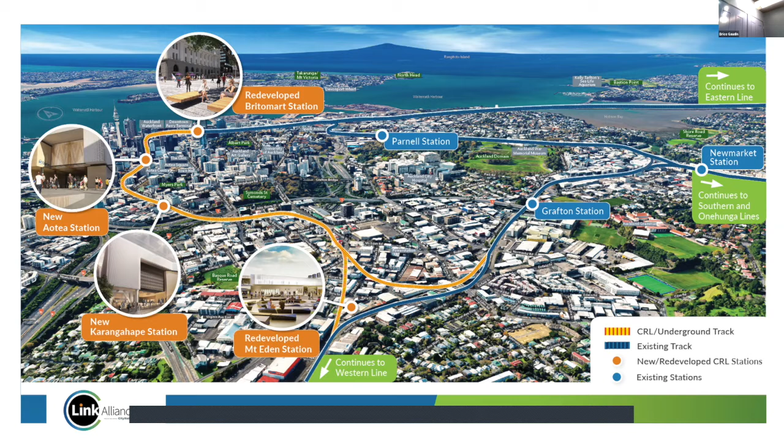The fact that this link will be operating will double the capacity of the Auckland network in terms of mass transport, with up to 54,000 passengers per hour. So it's double the capacity. It will also double the number of Aucklanders being able to reach the CBD in less than 30 minutes. So this project is really transformational. It will really transform the city.

So when you build a link like that, of course, you take the opportunity to create new stations. And we are also constructing 3 new stations. The first one is Aotea, just next to Aotea Square. One is Karangahape, and the last one is Mt Eden Station. In fact, there is already a station there, a very simple platform, but I will show you a picture. We are redeveloping completely this station.

The fact to create new stations in the CBD will also transform the city. And you will see an impression of what the development around Mt Eden can be, but it will be massive.

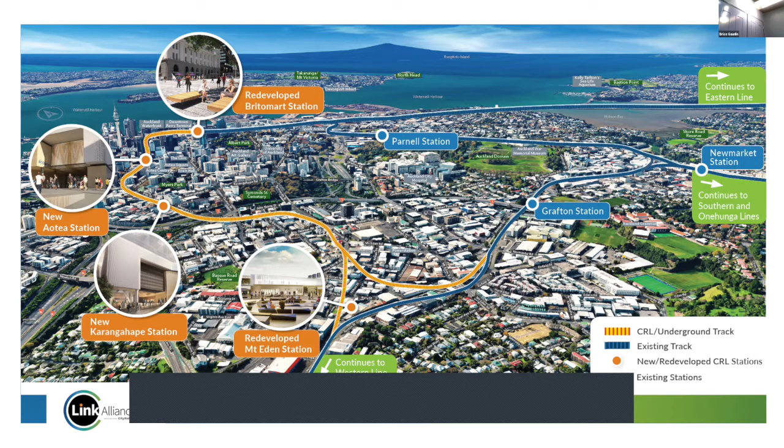So this is the cross-section of the project, 3.6 kilometers long, from Britomart to Mt Eden. Britomart, the existing station, is under sea level. And Mt Eden, you see, is 70 meters above sea level. You see the slope here - we are at the limit of what a train can climb. This is a challenge today for our engineers, because the platform has to be horizontal, and what is left to climb 70 meters is just enough, 3.8%, which is the maximum possible for a train. After that you have a problem between the wheel and the tracks.

Aotea station, in fact, is built underneath Albert Street. I will show you a picture. It's a station which is not very big, 18 meters deep, just underneath the street. Karangahape is a very big station, 42 meters deep, so it has to be built like a tunnel on a shaft. I will show you a picture. We have already excavated the shaft and we are now tunneling to create the underground platform.

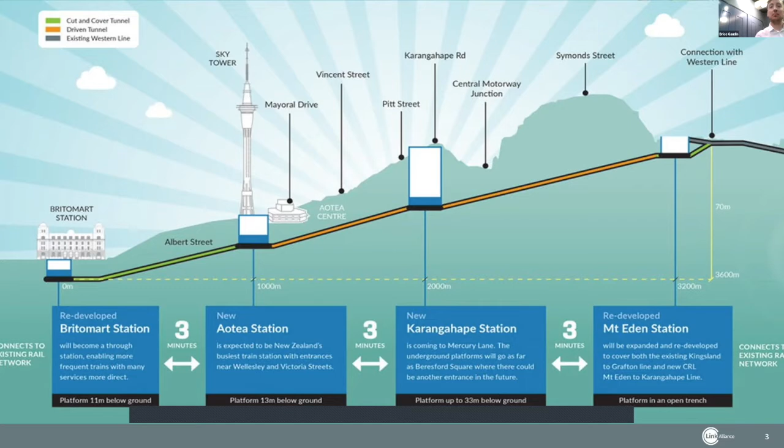So let's make the journey to our City Rail Link. We start at Britomart, so you recognize here Britomart. So the train today stops at Britomart and has to reverse back to Parnell and Newmarket, but in the future they will be able to continue in the other direction. So there is a necessity to build a tunnel underneath the central post office, and this project is almost complete now.

It has been realized by Soletanche Bachy, a subsidiary of VINCI, and Downer. Very challenging building - I could speak a lot about that, because you can imagine making a tunnel underneath a heritage building, it's quite complicated. So it's a piece of engineering, only this project. You don't realize it when you pass nearby, but it's a very interesting project. Then the tunnel goes underneath the Commercial Bay, and having a very sharp curve, goes underneath Albert Street.

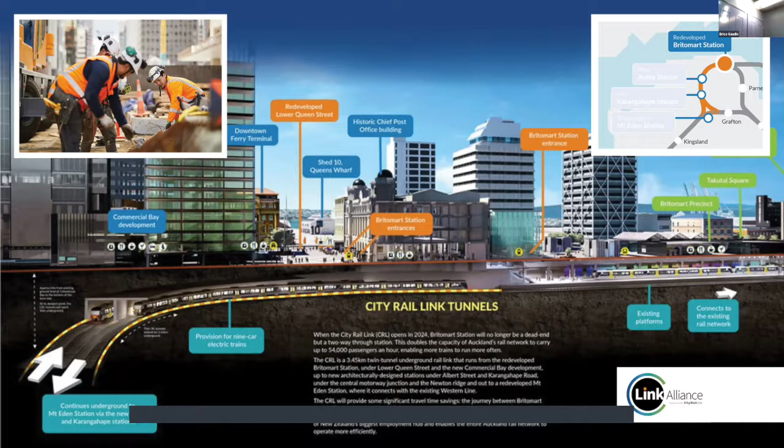Then we arrive at Aotea station. So here you have Victoria Street, crossing between Victoria Street and Albert Street. You see the station we are building, 18 meters deep, 15 meters wide. You will have the train going at that level, and here you have the concourse. We are building here - this is the entrance to the station. On Victoria Street, here is the Auckland Council offices.

This is a picture of what's happening now. To build this station underneath Albert Street, we have to construct what we call diaphragm walls, which are concrete walls on both sides of the street to be able to excavate the station.

This is a high bird's eye view, I think it's taken from the top office. This is taken from, I think, the higher level of the City Council office. You see the structure entrance here - this is this building. So this is the equipment to construct the diaphragm wall.

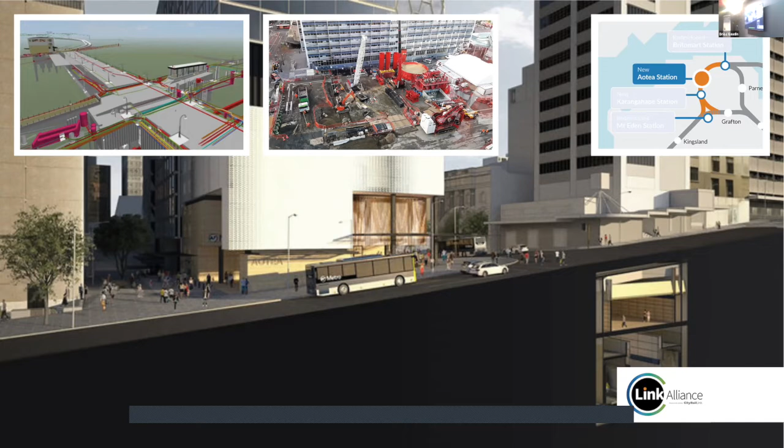Here you can see an illustration of what we can do with BIM to locate - here I think it's all the utilities on the street. And you can imagine when you construct a station like that under Albert Street, you have a lot of utilities, from water, wastewater, power, communication, whatever, to divert before we can do the job.

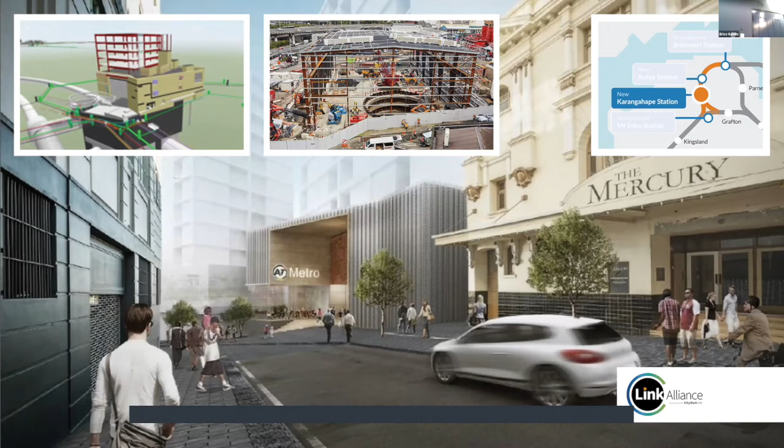Let's go to the next station. So here we are at Karangahape. This is Mercury Lane, and you know the Mercury Theatre - this is also a heritage building. And next to the Mercury, we are building the entrance to this Karangahape station.

So this is the entrance. I told you that the station was very deep, 40 meters. We have already excavated a shaft down to the 40 meters, and from the shaft we will excavate what you see here, the two platforms. On top of the shaft we have erected a noise enclosure, so we will be able to work 24 hours a day, eventually 7 days per week.

Last station is the Mt Eden station. So you can see here somewhere Britomart. The tunnel will come in and will connect to the Western Line here. This is a new redeveloped Mt Eden station connecting to the existing platform which is there. And this image shows you what could be the redevelopment at Mt Eden.

Today, this looks something like that. So we have excavated here what we call the portal. It is already 25 meters high, and from the bottom of the portal we will have the TBM, which will be launched eventually next year in April.

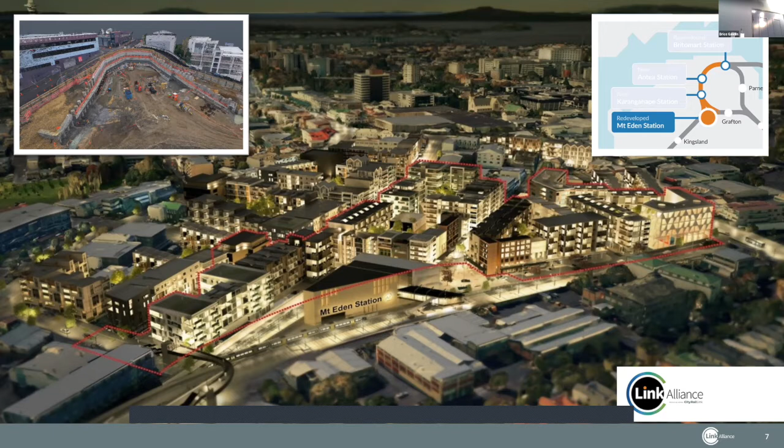So the way to deliver this project is through what we call an alliance. An alliance is a type of contract where you find 7 entities: 3 contractors, VINCI Construction Grands Projets, Soletanche Bachy, with both VINCI Construction Grands Projets and Soletanche Bachy being subsidiaries of the VINCI Group, and Downer, which is a very well-known New Zealand company. 3 designers, probably you know the names, AECOM, WSP, and Tonkin and Taylor. And our client, City Rail Link Ltd.

We see the City Rail Link Ltd, and we are all working together. So for those who are in construction, you know that we are used to working in joint venture. Here we can say that we are in joint venture with our client and our designer. So we take all decisions together for the best of the project, and we share everything together. We share the money together, we share the pain, we share the gain. So the principle of the alliance is everybody wins or everybody loses. This is a very interesting way to deliver very big and complex projects and drive a very interesting dynamic into the project. It's quite successful.

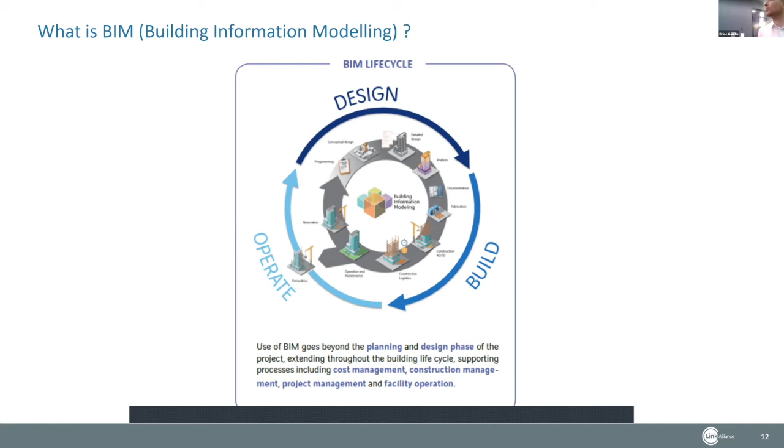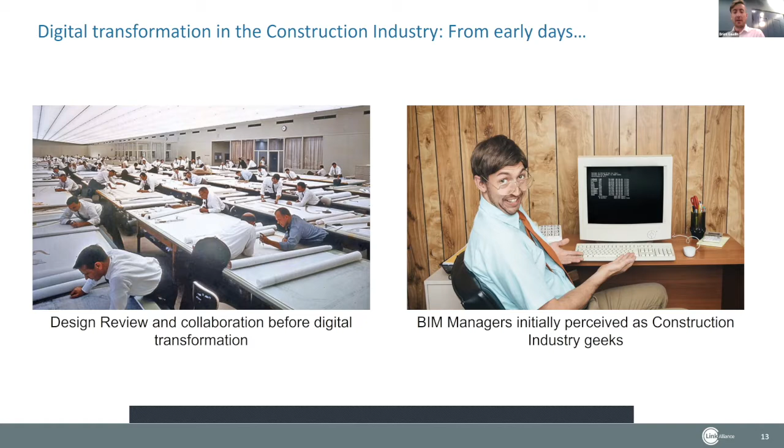Like robotics, 3D printing, cybersecurity, simulations - all these trends are shaping the way we work and the way we will work in the near future. One key point of this is not to be mistaken by the digital transformation and the technologies associated to it. That's probably the key point of driving this and driving the journey of moving to digital delivery.

So the first use case for that is probably training people to use this new way of working technology, and then coordinate all the BIM models, BIM designs, perform some design visualizations, help the pre-construction, help the construction methods, help the people on site, bring this technology to site - BIM to site, digital tools to site - so people can use it in their daily lives, daily job, and in the end, give this whole set of information to our final clients or final users as handover information.

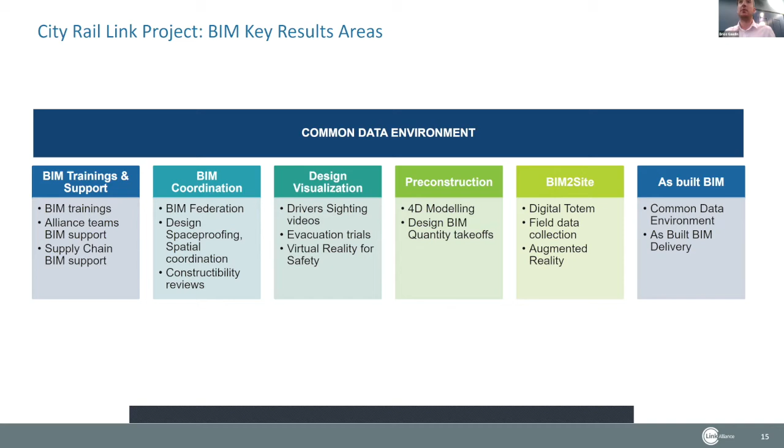So the intent of today is just to go through these different items to show you how we're effectively implementing them on projects and how it helps us deliver the City Rail Link.

All right, the first item will be the common data environment. The purpose of BIM is to break the silos and enable people to work together in a common database or common source of truth. That's what we usually refer to as the common data environment.

More than that, it's also enabling people to do the data harvesting themselves, not only having a BIM guy on the side doing all the digital tools, but having people involved in using the data that they are producing - quality assurance data, cost data, project management data, many things we can go through in this presentation.

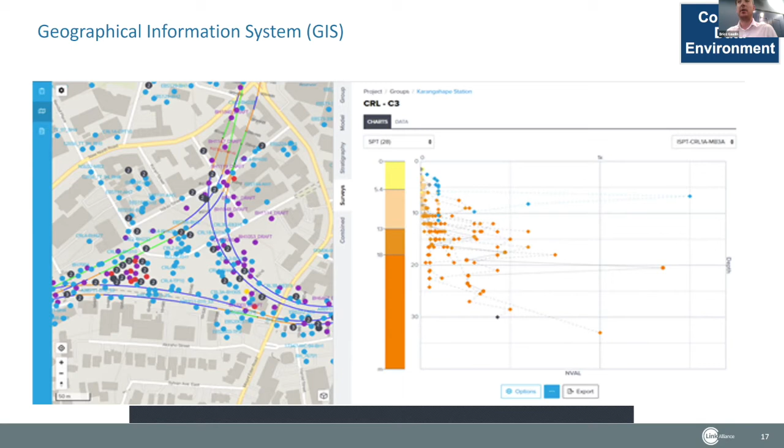All right, next topic is how do we train people to be able to use these new emerging trends and technologies.

We have put together a set of trainings and support to enable the different teams of the project to use it. In this project, we have design, engineering, construction, project controls, environment, sustainability, communications, and our team is central to support all these different entities.

We developed custom trainings and provided support to those different teams for BIM software mainly.

What you see here, we have almost 350 people trained to date, but it's going to grow up, especially when the supply chain is fully on board. At the moment, we are getting the supply chain on board, like subcontractors and suppliers, and it's going to be growing in the next couple of years.

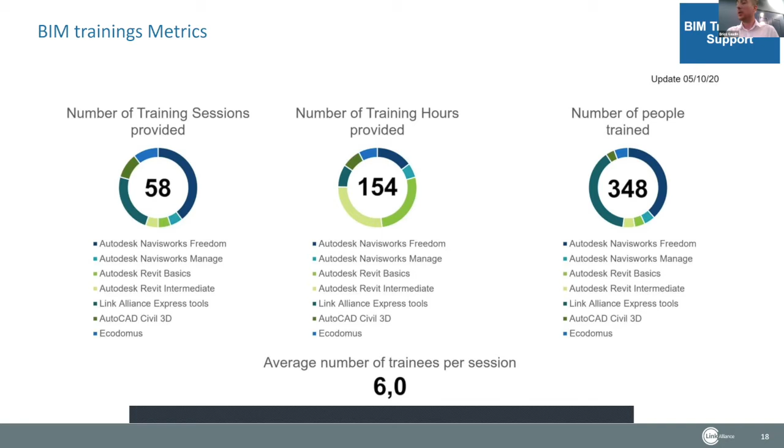We have a dedicated training room, a computer-based training room, where we provide those trainings. We have 6 seats, and every week we have people coming there - subcontractors, suppliers come to get those trainings.

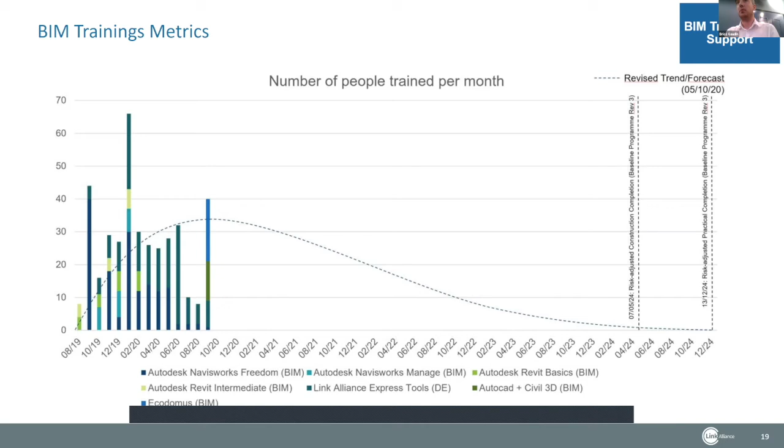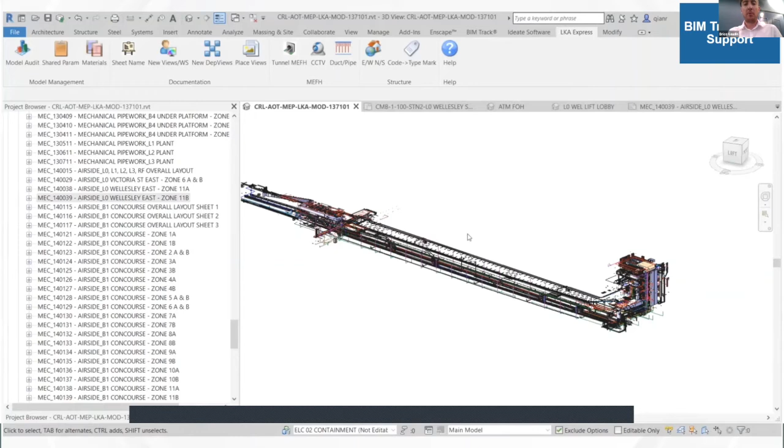The next step is to be able to deliver, first of all, the design model. What we have in our team is a team of software developers that developed plugins in the software we use, the BIM modeling software. In this case, you see Revit, the main design authoring tool in our project. We have a team of developers that develop plugins in this software to cover for some shortcomings, because Revit is mainly a building tool, but when it comes to tunneling, it's very difficult to model in Revit.

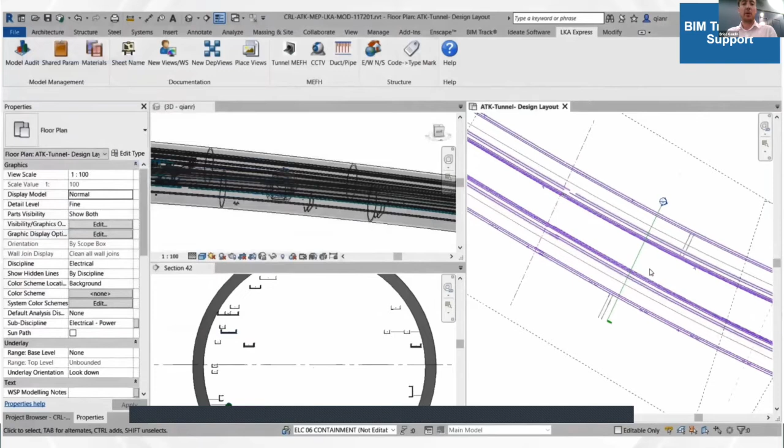So we developed this plugin. What you see here is the placement of cable trays in the tunnels, which is not easy with the regular tools of the software. We had to develop this, and it's quite good actually, because usually when we develop plugins, we outsource - we ask a specific developer outside of the team to develop for us. But here in this project, we have people with this capability, which is great to have in-house.

The next approach is probably a bit more common. What you see here on the left side is our coordination meetings. What we want to see here is that our model is the central truth.

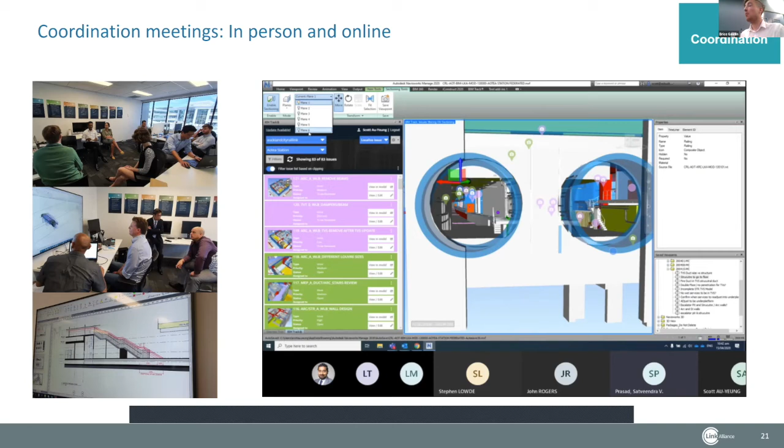Having this during the COVID pandemic era was really crucial, because since everything moved online, we were able to pursue the design, not the construction activities during level 4, but at least the design and engineering was still happening during COVID. I'll move a bit faster.

The idea here is the data harvesting for BIM issues. What you see here is the issues per area. We are able to manage the coordination issues that we see in our model, and having this in a data-oriented approach rather than spreadsheets is really great.

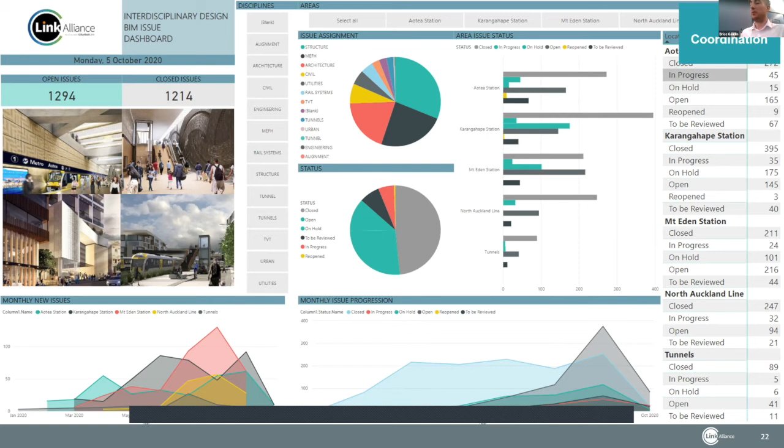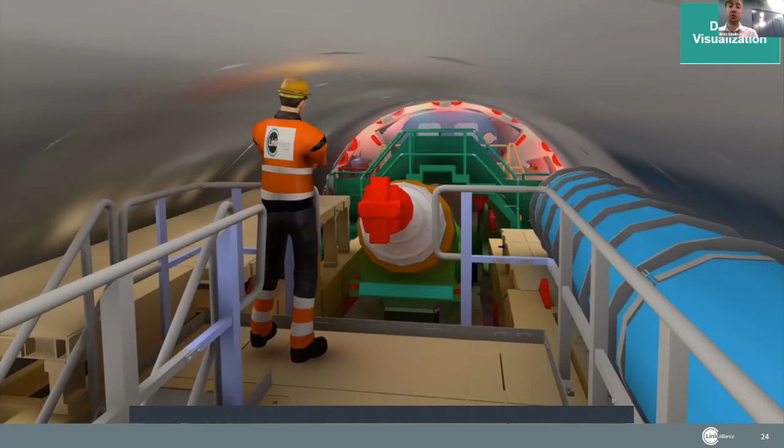Very crucial for us to merge physical assets and digital assets. An example: diving into the TBM, tunnel boring machine, we developed a health and safety virtual reality environment for our people on site, for them to understand what a TBM is and what the hazards are. This is very important because these works are not usual in New Zealand, or even everywhere in the world. Having this virtual environment helps people understand how construction will happen, and it's also much cheaper for training than doing it in a facility.

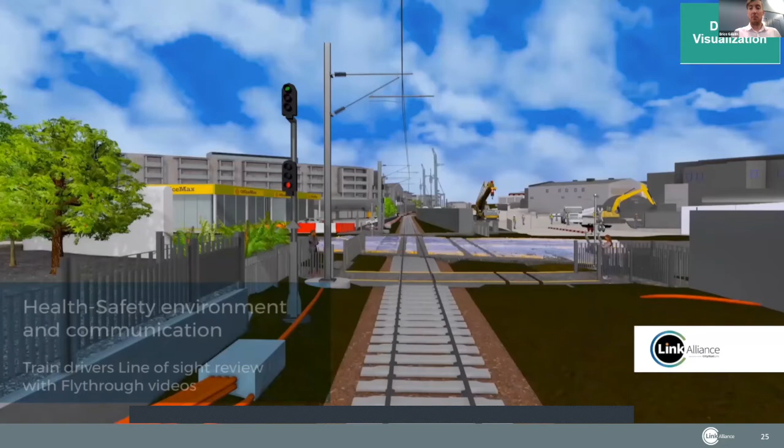So we work closely with the H&S teams. This is another example. That's my time now, so let's give you an example.

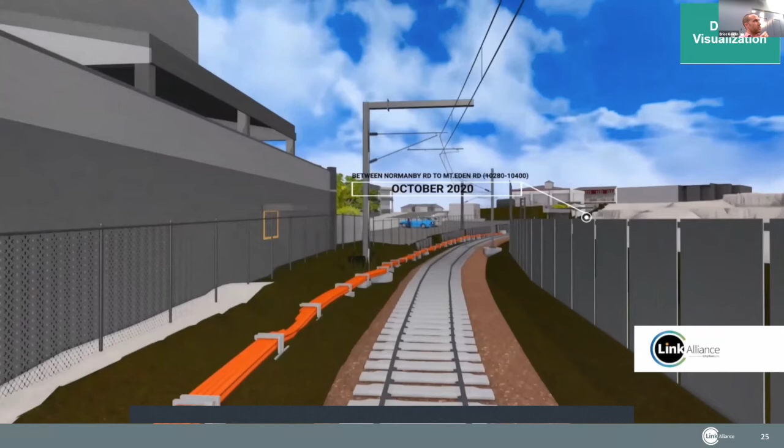Let's give an example of the way we use the BIM model and the information we've got, to provide information regarding the staging of the work. You've got the drawings done for the project, but you can see that sometimes the staging of the work is better shown another way.

For instance, for that project, we decided to produce a drawing showing what the state of the single line running in Mt Eden on the North Auckland Line would be, so that both the stakeholders, the neighbors, and the train driver can see what they're going to face during construction.

You can see we've installed that hoarding. That hoarding is on now, installed in the last couple of months since the single line running has been operating.

Basically, the information shown is a mix of the current design of that stage, along with the point cloud information slightly enhanced by the team. That gives the drivers almost like a training, to make sure they know exactly what it will look like for the next 15 months of their job. That's one of the ways we work on those things.

On a practical level, all the data collected by the BIM team and digital engineering includes the design quantity takeoff. Brice insists that all the drawings are updated and federated, and then everything is collated, so we can see the evolution.

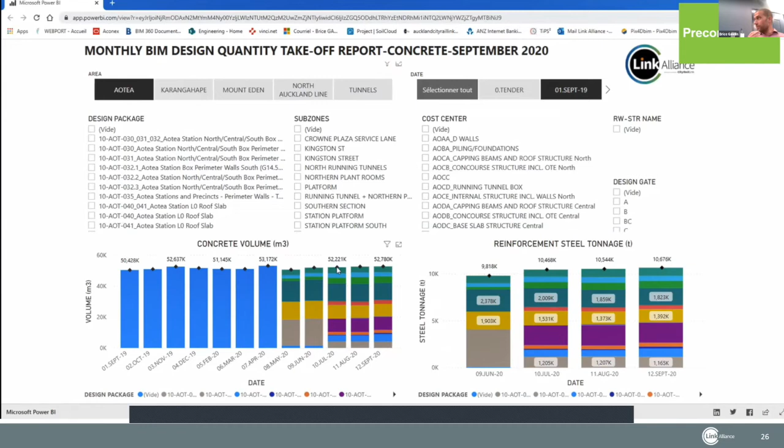That's something we've used in our reforecast. We can monitor the progress of the design and potentially value engineer if needed. That's a very valuable tool, which is why it's important that all the information gets collated properly in the model, so we can rely on it.

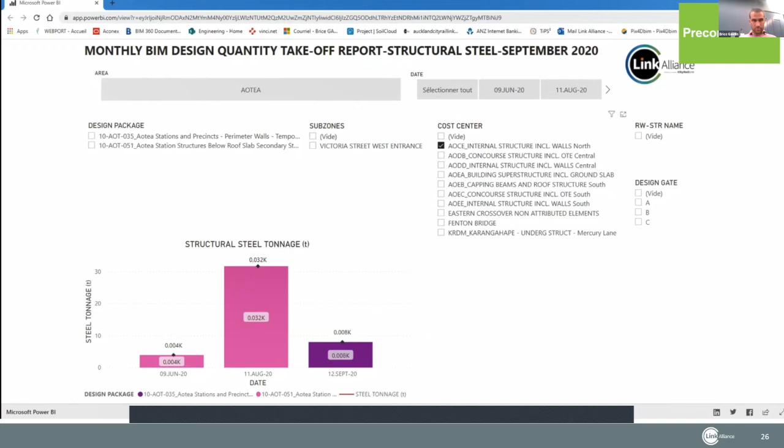That's basically the tie-in between the North Auckland Line and the station. Let me go close to the screen and try with the microphone.

It's something that is very hard to visualize on drawings. On 2D, you see a spaghetti of tracks, and in cross section it's very hard to comprehend. When you put something like this together, to me, it makes a lot more sense.

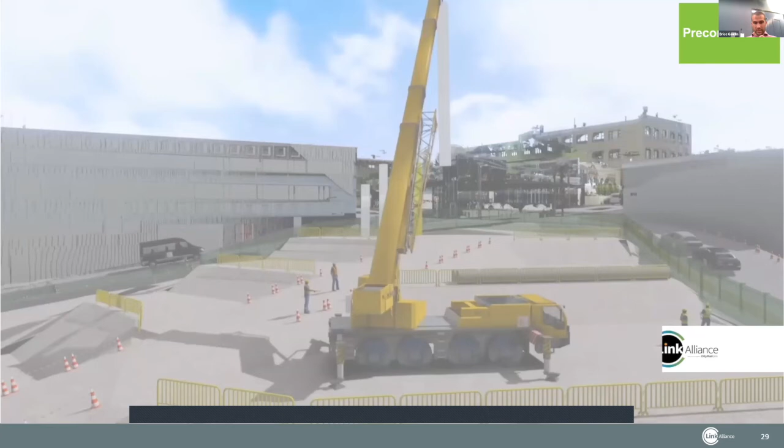So that's also one of the videos that we produced both for the stakeholders, but to be honest, it was quite useful for some people from my team that were new to the project, so they could understand how we build the portal.

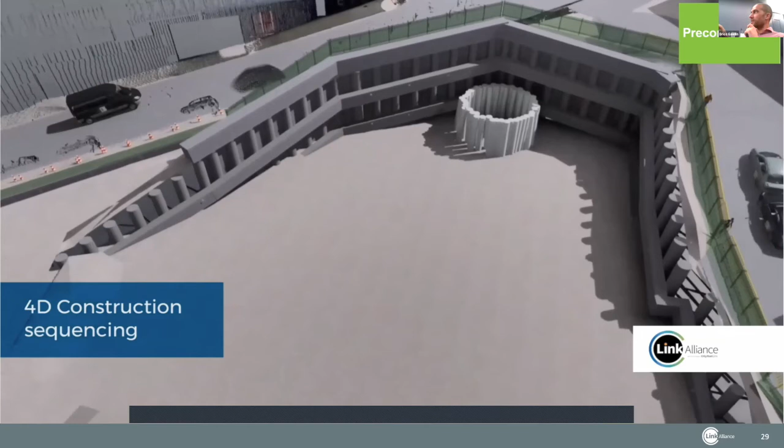So the idea is to integrate the methodology into a 4D principle to show the evolution of the work over time. What we see here is the fact that because of the gradient of the road, we have to install a platform and then start the piling from the top and go down to the next platform, etc.

So that's the type of information that doesn't communicate very well on 2D. And even for people like media, such as TV3, which are literally just next door—that's the building you can see on the top left—explaining this to them, since they could see it from their window, made a lot of sense.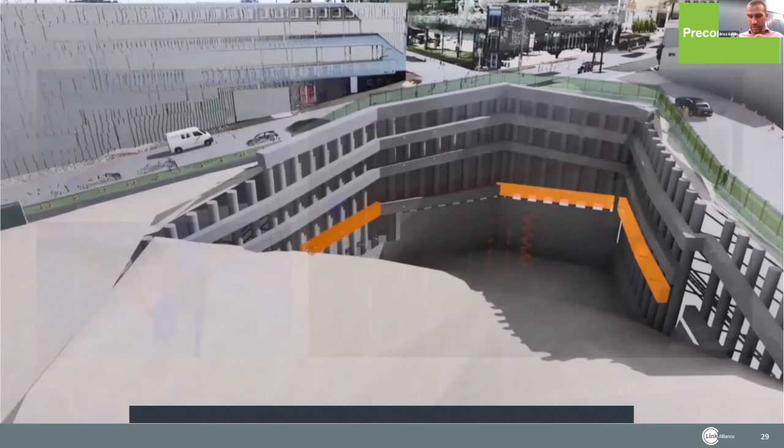It helped them see what was coming and was very useful. So that's the type of use that we've got on the project.

So that one is really to show, and as Brice was saying, it's a complete mix of existing survey. What you can see on the outside here, which is very much in color, is the point cloud survey that we do.

We do a drone flight every month at least. We use it to measure the quantity and the progress as a record.

It's basically a mix of the design of the ground retention to build the tunnel, but also the site installation for the tunnel. So what you can see here is our offices, the car park.

What will be the technical area to support the tunnel boring machine, the spoil shed, which is at the bottom here—a building which has not started yet—and then the segment storage. If you went on site now, you could see all those retaining walls of the portal and of the segment storage, but a lot of groundwork for utilities.

So that's a very good depiction of what the site will look like in April for that picture.

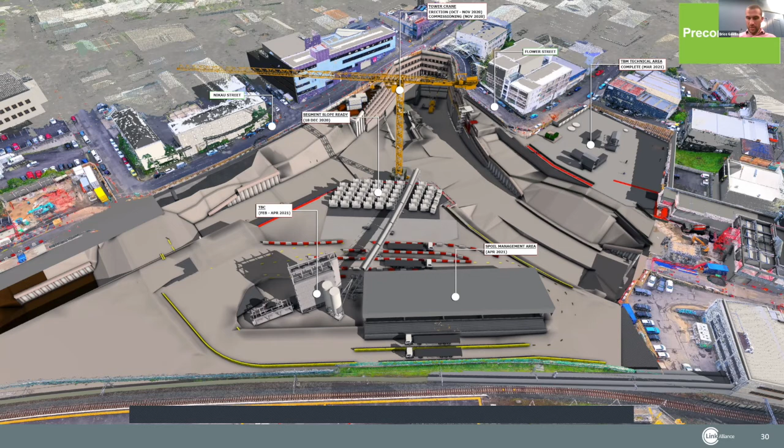And then you've got another view to give you a bit of perspective. That's a view taken from up high, as if you're standing on top of the platform looking at the portal this way.

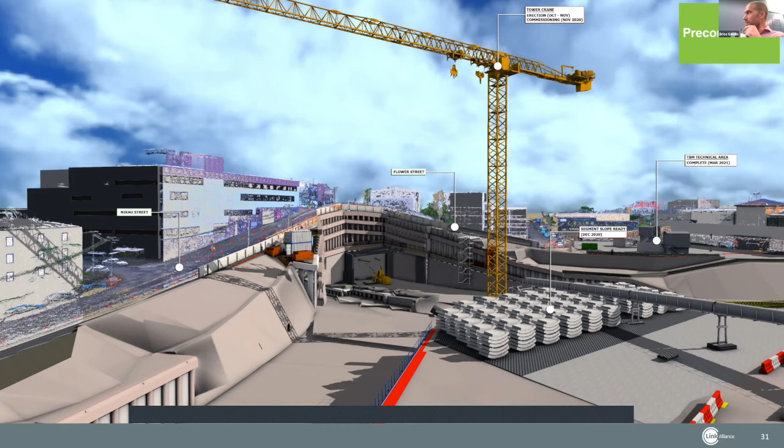At the moment it's looking pretty much like this, except you don't have the segments stored in that location yet. You can see the conveyor running from the right, which will remove the spoil from the tunnel boring machine. It runs all inside the tunnel, operating 24/7, and dumps it in the spoil shed. It's a very good way of explaining to neighbors, visitors, and other interested people how the tunnel operates.

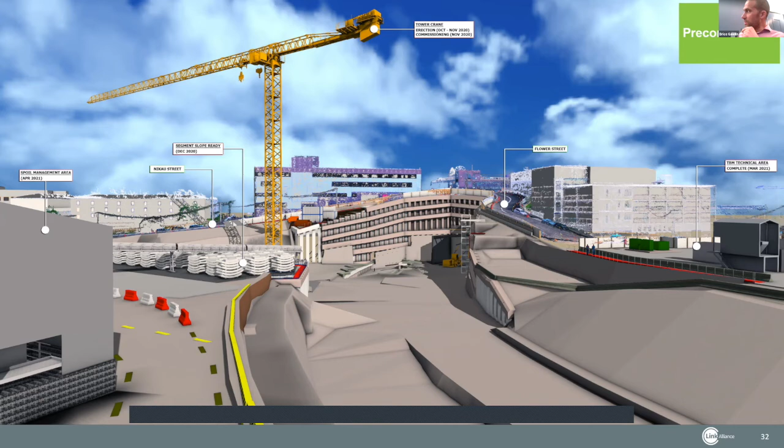Here you're literally on top of the future cut and cover tunnel, which is part of my scope, but it's also used as the access ramp to bring the TBM down for both drives. What's important to understand is the TBM gets assembled here, goes all the way to Aotea, and then comes back to Mount Eden. So twice we have to accommodate the whole logistics of reassembly.

So yeah, I think pretty much there - that's another way of looking at it. When you integrate survey software with the BIM, you can literally have tools which connect the model to almost like a camera that you're using in real time.

You can see here we already had done the portal, shown in gray. It lines up exactly with the design, so you can see what has been done, and you can see it was done very, very well, which is good. But you can also see the future tunnel - what you see here isn't very easy to make out, but that's the future structure we build once the TBM is finished.

We have to build that junction, that kind of spaghetti junction for the train. That's something that could be very easy to explain to people - you have the model, you look with a camera, and you can select what you want to see and how the site will be in the future.

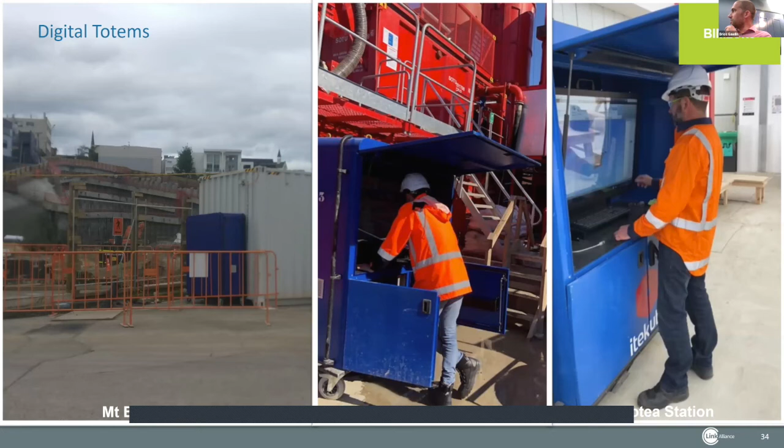So that's quite interesting. And then we've got other initiatives here, the digital totem - basically a little workstation with a computer and a big screen made available on site, so people don't have to go back to the office or print too much, and can access information on site, from SharePoint, Aconex, Navisworks. You can really look at all the information without leaving the site, which is good.

The next slide is a bit more business as usual, but having tools to access data, drawings and documents on site is really important. These are just some screenshots from our mobile app platform where we access that information - but I think you've already worked with this widely, globally, not only in New Zealand.

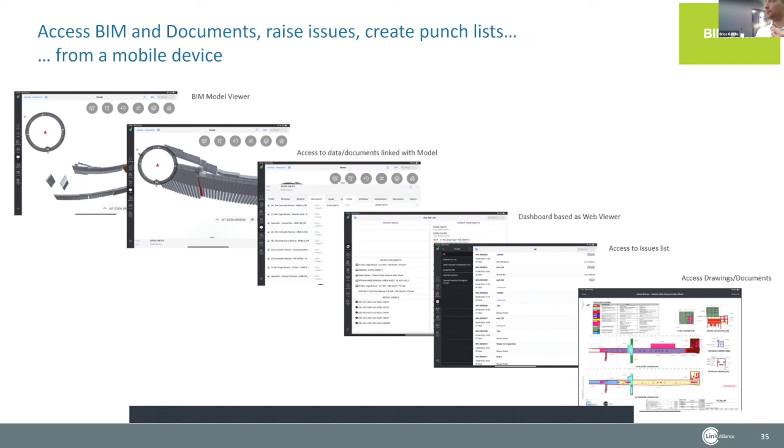The last step of our journey is to be able to collect data and provide our final clients with what they require for their own works, for operations and maintenance. So we have a workflow where we get GIS data, document management system outputs, BIM, all the site reporting and surveys in a single platform that goes to City Rail Link, Auckland Transport and Downer Maintenance for their own use, and for them to use in the CMMS.

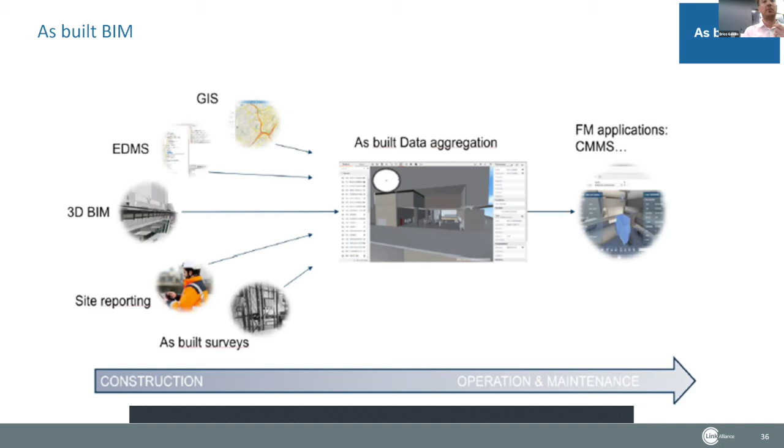CMMS is a computerized maintenance management system - it's the system they use for planning maintenance. In real terms, it's now a platform where we collect this data and add asset information, so we can build their asset register, and they're able to take over from there.

And having this is quite important when somebody wants to build a digital twin - the digital twin being the representation of assets during the operations and maintenance of a facility. So this gives an overview of what we do on the project.

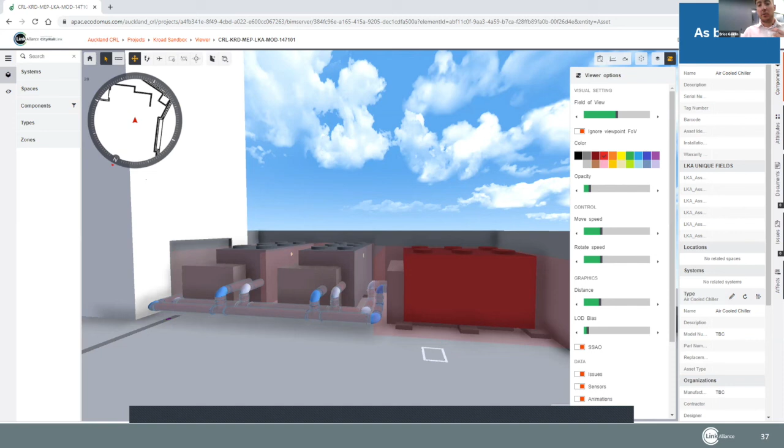Obviously, it was very short and in a nutshell, but we're happy to provide more details and comments. This is a very large project with various teams - design, construction, different contractors, different design teams - and we come as a single alliance and single team, which is great. We rely on overseas expertise, but also on local talent, local partners. I have a team of 14 people now, and half of the team has been trained here in Auckland, graduated from Auckland University or AUT, and it's really great to build something locally with people coming from all over the world. It's good, all right, that's it for us.